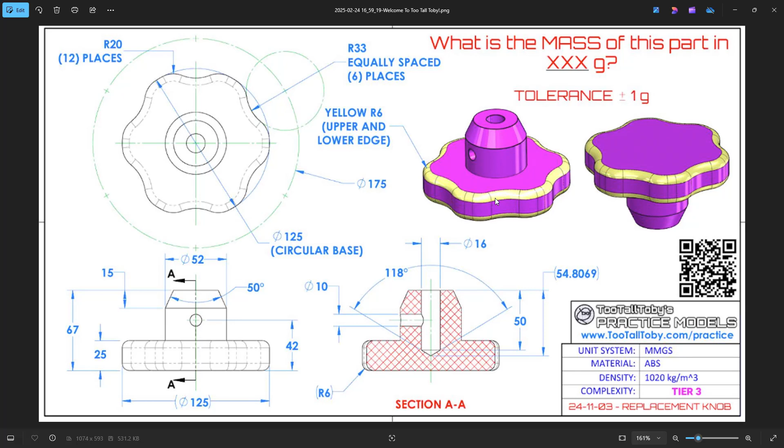Today we'll be going through another practice TooTallToby model dated 11/03, the replacement knob. Looking at this model, it's a series of cylinders, cut cylinders using a circular pattern, using the hole cut within the catalog, and then even using some blends. So going through IronCAD, we'll be able to design this part very easily, very quickly.

Starting off, we'll add a cylinder from the catalog. We'll adjust the diameter to the 125 diameter, adjusting the height to be 25. Now we'll go in and add the cut cylinder with the total diameter of 66.

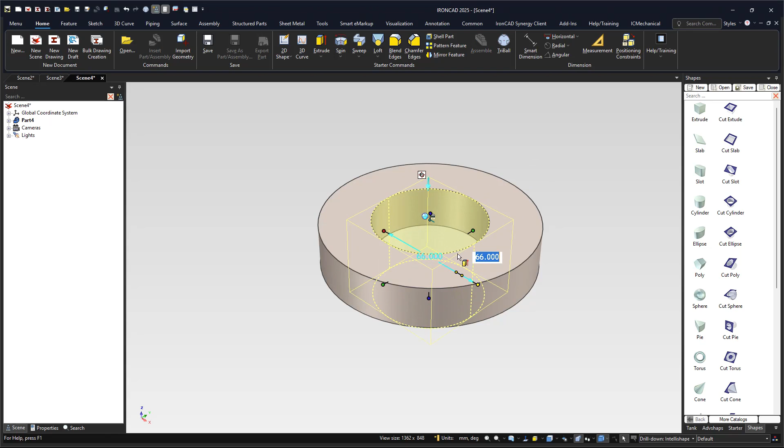We'll go into the TriBall. The total distance or diameter of this circular pattern is 175, so we'll do 175 divided by 2 to get that radius. And what we can do now is go into the pattern feature.

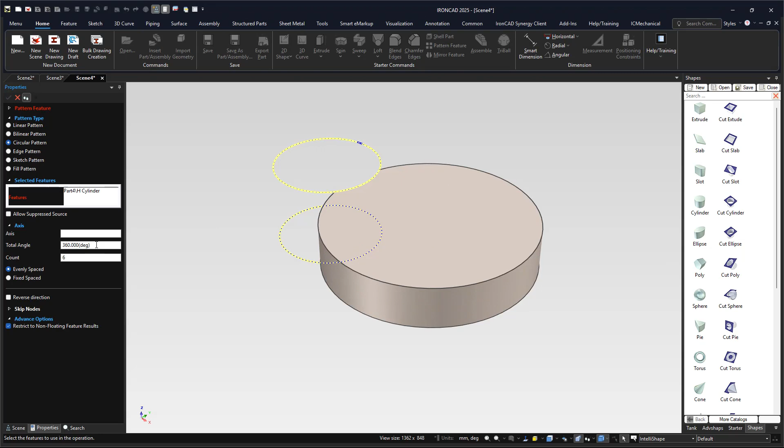Make sure that we're going into a circular pattern, that way we can go and create. So circular pattern, it'll be 360. Good. The axis would be here. It'll be evenly spaced. Click OK.

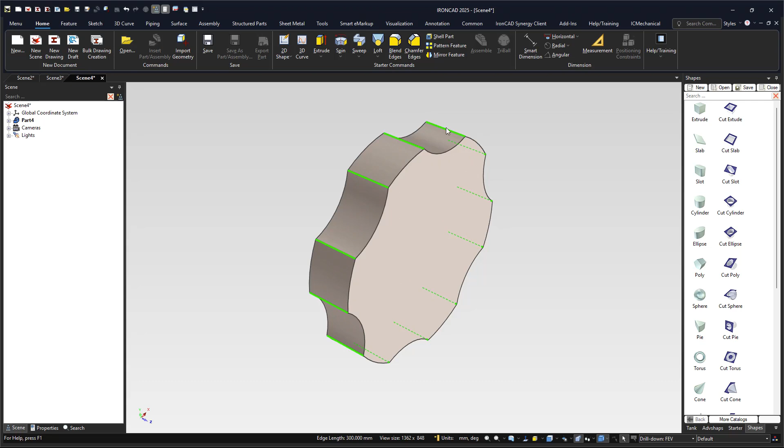Now what we'll do is we'll go in and select each and every single one of these lines here to make sure that we can add the proper blends, which is a total of 20 millimeters for each of these corners. Add the blend, 20 millimeters.

So now what we can do is we can go in and add the cylinder here in the middle. The cylinder has a total diameter of 52. We can adjust it here. We can see the total height from this point to this point down at the bottom is 67, so we can adjust this.

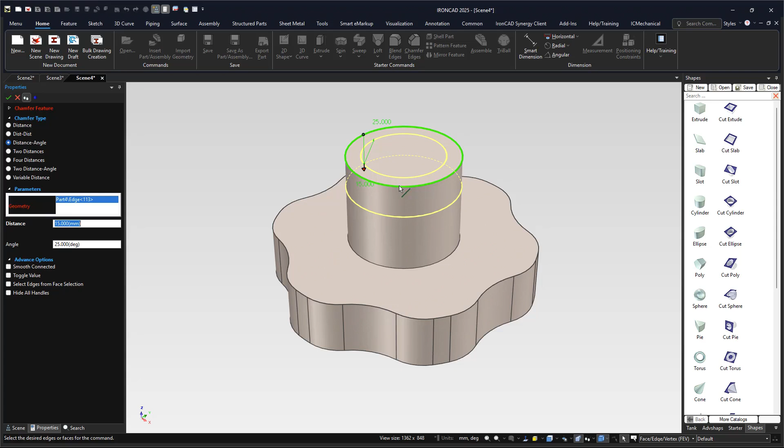What we'll do now is we'll go in and add the chamfer here. So this chamfer will be the distance and angle. We'll add it to this point here, it'll be 15 millimeters and 25 degrees. We'll click OK. And we'll go in now and add this hole in the middle.

So we'll go back to the IC Mech tools, add this hole here to the center. This will be a normal hole, not flat, it has a bottom V of 118 degrees. The total diameter will be 16, and the hole depth would be 50. Click OK. All right, there we are.

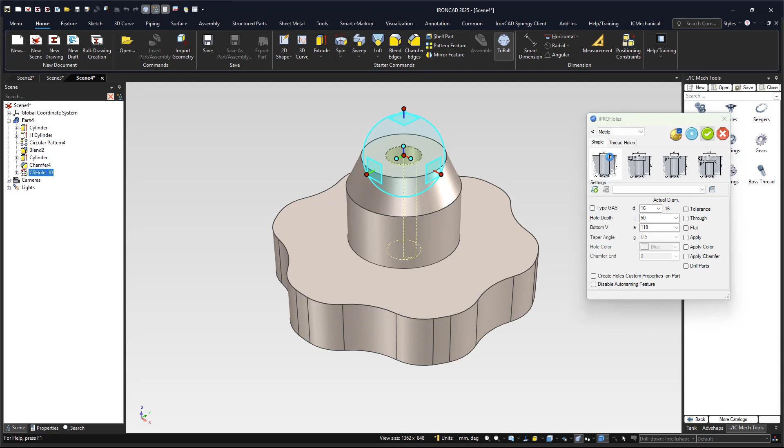And so what we can now do is go back in and add the secondary hole, which we can add as a cut cylinder here. So we want to go to the top, make sure we add it to this quadrant here. This is the total diameter of 10. If we go back to the right side, we can adjust with the TriBall, make this 90 degrees.

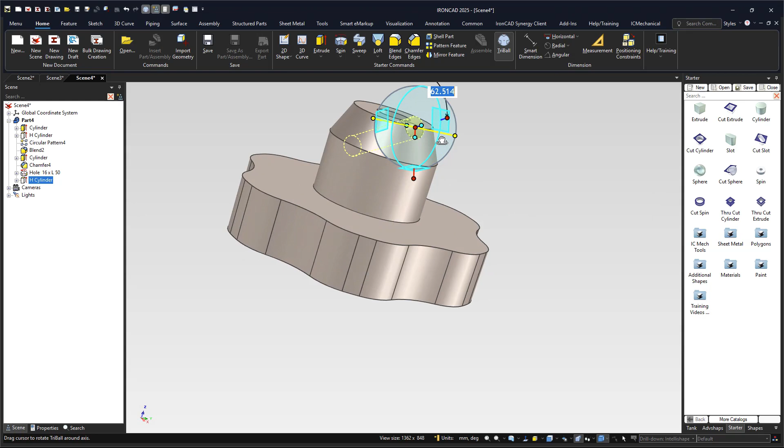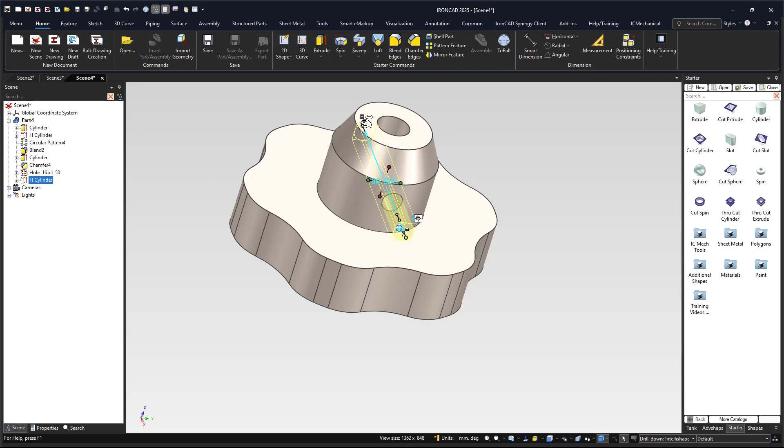We can adjust this here. To the right, so we know that the total height from this 10 to the middle to the bottom is 42, so we can add from point 42. All right, so what we can do for this hole is bring it out here, and we can bring this to this center point here.

Great, okay. And then lastly, what we can do is we can go back in and add the blends. This blend here would be 6. This blend here at the bottom would also be 6 as well. Click OK.

We'll go into the properties of the final part, we'll adjust this to be 1020, and a total of 344.9 or 345 is your total mass.